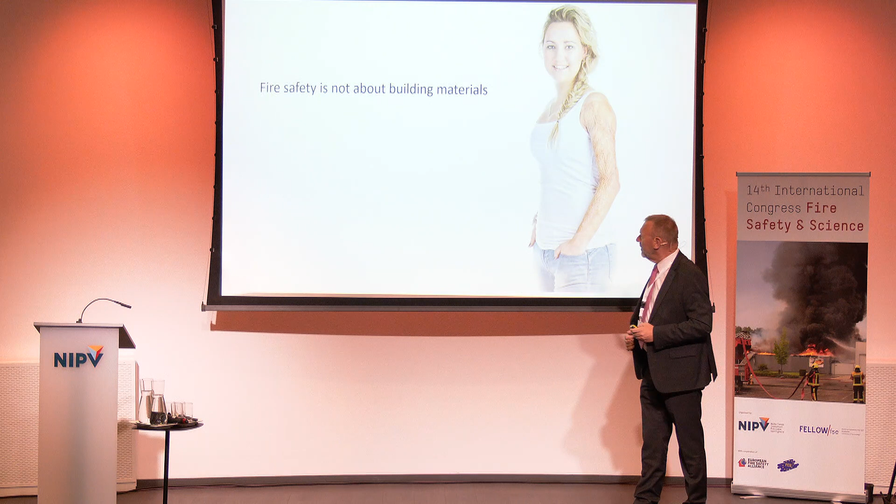It's not about figures and data. Those are numbers. Fire safety is not about numbers. It's not about engineering. And I know what I'm saying now at a Fire Safety Science Conference with all those fire safety engineers, but it's not only about engineering. It's more than that. It's not about codes. It's not about building materials. It's not about modeling.

Not about installations. Not about testing. Not about a lot of things. But what is it about? That's what I was thinking when I was invited to be here now on the stage. Fire safety is about people with names. Sanne, this is Sanne. And what we are doing, this is Sharon. Sanne is the next one. Okay. Yeah, I had to start all over again.

It's about people. What we are doing, we all, is prevent people from those burns. That is why we are working on testing, on codes, on building materials, on fire safety engineering, at the end on firefighting, and after that, about the burn scars. We all are working to avoid this. It's about people.

And I care about people, and I think we all care about people, and that's the essence of the work we are doing. Of course, we like calculations, mathematics, and whatever it is, the fire dynamics and whatever, but it's about people. And we can't do this work without caring about people.

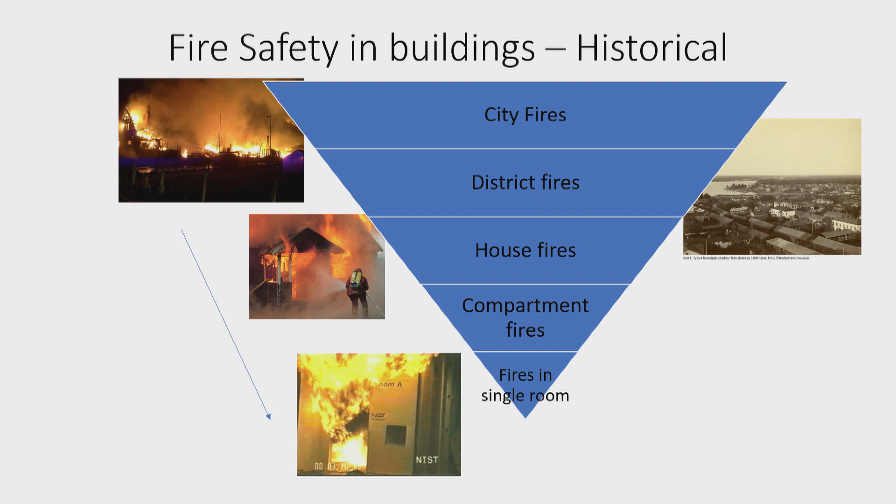So we said, okay, we still have house fires. We don't want to have house fires, so we make regulations. I'm not going to go into every step of how we reduced it. And then we said the houses aren't enough, we need to have compartment fires, and we keep them inside a so-called fire compartment.

But we see that maybe that's in order to reduce both fatalities, but also, as René showed very well, those people who are injured and having to suffer with that all their life. We are coming into fires in a single room and try to limit that and solve that. And that's a big challenge. So we have, for us, we come into personal integrity items and so on. It's a long list, and I'm not going to talk too much to take time from the other speakers.

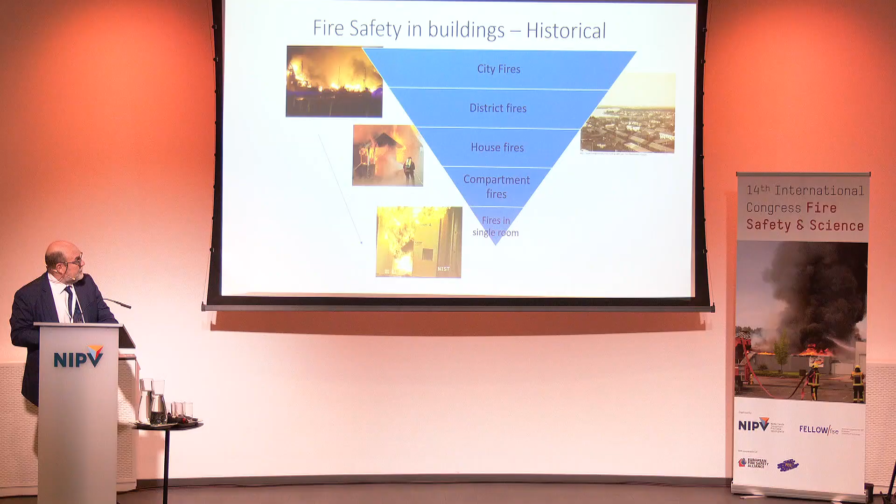But that's where we are if we look at it from the history. And we have at the other time, today and maybe the future. We have very innovative buildings, high-rise buildings, multifunctional. There's hardly an airport where there's a train station, a hotel, a conference center, and all these things. They are very complicated, and we have to solve that.

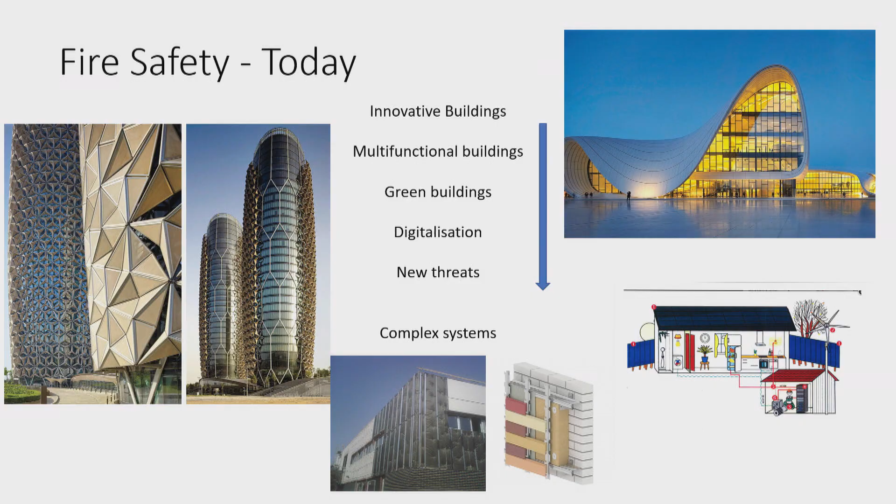We have green buildings, and I made this picture here to the right where you have a greenhouse - a house with green building technology, not a greenhouse, that's something else - where you have solar panels, you have batteries in it, and everything around that. And so we have suddenly a different situation.

And think about this again, this idea of trying to keep it inside maybe a room or a fire compartment. We have digitalization, which gets more and more present. It is kindly an aid to us, but it's also maybe a threat for us if these things are not working. And we have new threats.

When I made this presentation a year or two ago at the conference, we talked a lot about these so-called antagonistic attacks. Now we all know that after COVID we came into another safety position where we don't know what's really happening sometimes. We get very bad feelings if you see the safety and security on a military front, and we need to cover that because fire safety needs to tackle that also. And everything becomes more and more complex.

And I will talk about that. This is a little bit an introduction to tomorrow, so I have extra 5 minutes tomorrow. So that's the trick, that's a little bit the introduction.

So think a little bit about the history, how we go towards protecting, let's say, the single room, and thinking about some of these. This is not a full list, just some ideas of what we have and what pops up today, and how people have to solve this, and also how the fire rescue service has to deal with these things, which are always changing. I'm very honest, I think we are sometimes always one step behind with all the innovations and the technology. The fire safety - okay, well, by the way, there's maybe a problem with the batteries in the cars and so on, but there are already thousands of them. But I don't want to just point that out. There's a lot of things.

Okay, I prepared some water just in case. Okay.

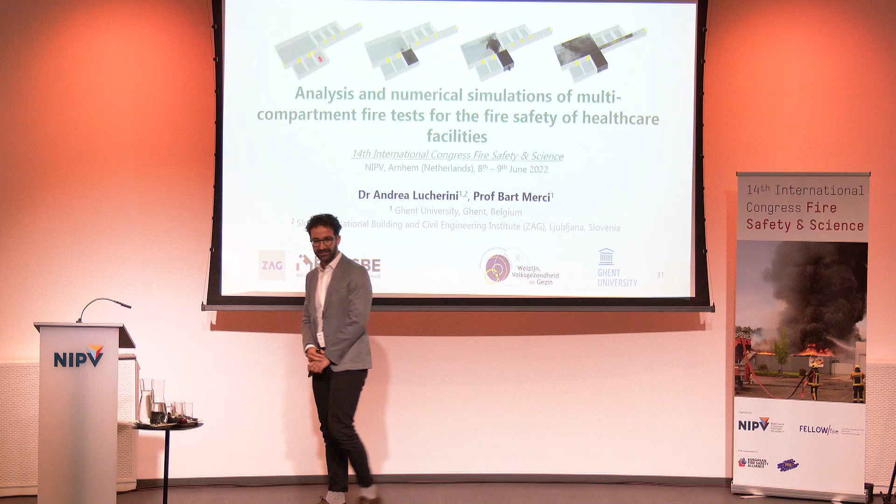Good morning, everybody, and thank you very much, Patrick, for the introduction. As Patrick just introduced, I'm Andrea Lucherini. Maybe as you can guess from my name, you'd expect a female, but I'm Italian, and in Italy this name is very commonly used for a male person. I'm here to discuss the analysis and numerical simulation of multi-compartment fire tests for fire safety of healthcare facilities.

The presentation is something I did during my postdoc at Ghent University, not too far from here, where I carried out different simulations and analyses on different compartments. First of all, it's a pleasure for me to be here today because, after 2 years of no conferences, it's great to discuss this research, because it was mainly carried out during lockdown, the COVID years. So it's very good today to sit down here and get feedback. If you have any questions about any aspect, please feel free to reach me at the end of the presentation - hopefully there'll be enough time - but also during the conference these days I'll be around, so I'll be happy to discuss that.

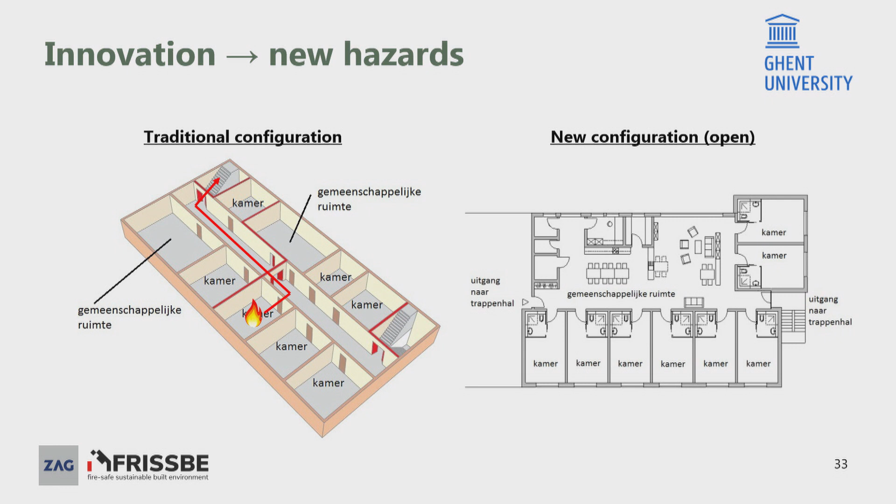This is the traditional configuration: you have compartments, rooms, a common area, and stairs for evacuation. If you have a fire in a room, people will try to escape into the corridor. The corridor usually has a low fuel load, so people can evacuate, and the fire, according to compartmentation, should be contained within the compartment of fire origin.

In the case of a fire in a common area, the person in the rooms can still go into the corridor and escape, and the fire again is meant to be contained within the compartment of fire origin.

In the new case of an open area, you have different rooms but also a big common area within or along the evacuation routes. If you have a room with a fire, people can escape and reach the stairs to a safe place. But what happens if people have to evacuate and the fire is along the evacuation route?

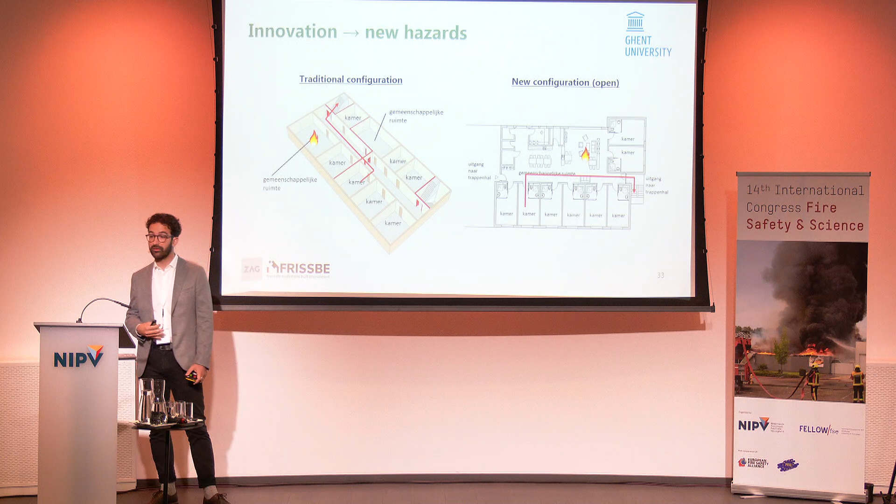This completely changes the fire safety strategy, and we might have a problem because people could be exposed to critical conditions along the evacuation routes, which we usually design and think of as safe.

So with different partners at the university and also at the institute, we started looking into fire safety in healthcare facilities, particularly how different active fire protection systems—detection, smoke extraction, extinction, different kinds of doors—can influence evacuation routes and different strategies.

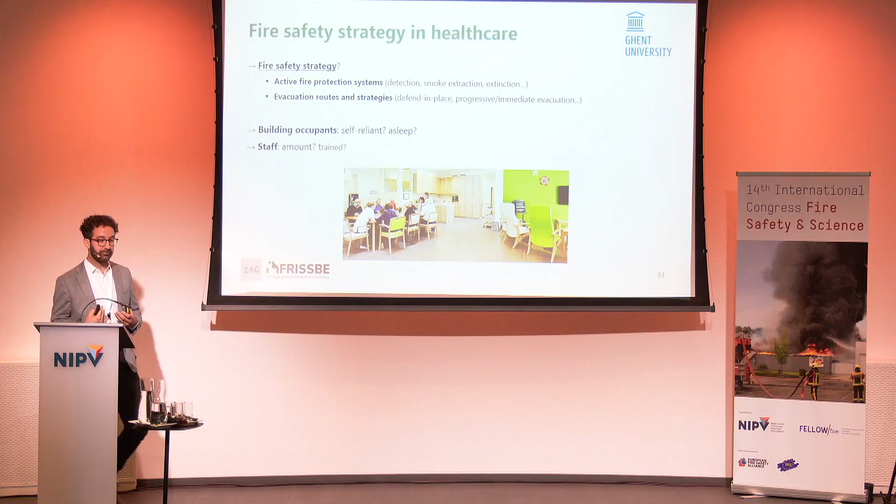Related to evacuation strategies, you can have stay-put, or horizontal and vertical evacuation within different floors. What's important within the building and healthcare facility is to understand what kind of occupants we have, because the fire safety strategy has to represent and be in line with the people within the building.

For example, in terms of occupants, are they self-reliant? Are they sleeping? And in terms of staff, is the staff trained? During night or day, what amount of staff is available within the building that can help with the evacuation strategy?

So what we did—maybe in the past you've heard about the VIPA 1 study carried out years ago—this is a continuation, with VIPA 2 and VIPA 3, of this big project that focuses on the new problem of open configurations representing a potential fire hazard along evacuation routes.

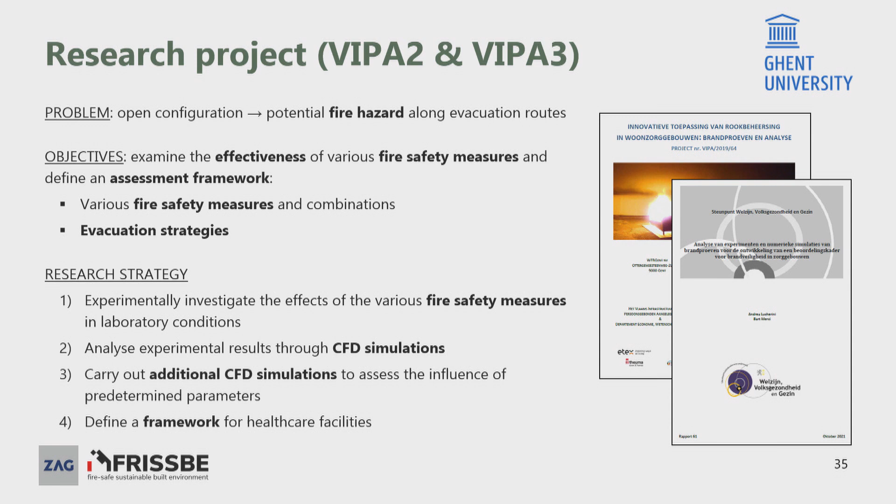The project focuses on examining the effectiveness of various fire safety measures, defining an assessment and evacuation framework to understand how different fire safety measures and combinations can be combined with different evacuation strategies.

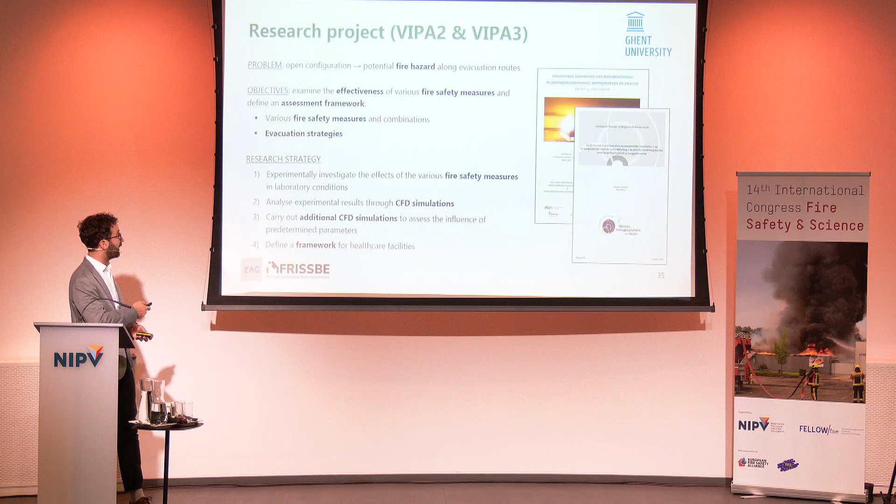In terms of research strategy, first we did some experiments to investigate the effects of fire safety measures in laboratory conditions, analyzed this information using CFD simulations, carried out additional fire safety CFD simulations to understand how different scenarios can change the variables of the study, and finally defined a framework for healthcare facilities.

To give some context, study number 1 was carried out in 2015. At the beginning, there were some large-scale tests carried out at Ghent and Warrington Fire in Ghent. This is the first case.

This is a multi-compartment facility with a big common area of about 130 square meters, two evacuation corridors with a single door or double door, and rooms connected to the evacuation corridors. The fire scenario studied here was a fire hazard from a two-seat couch.

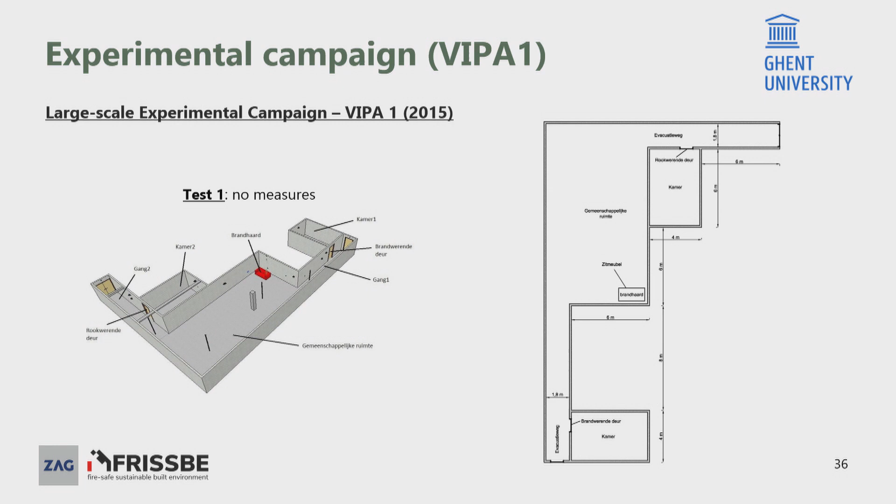They conducted 5 different tests. The first test had no fire safety measure. Then they looked into the other 4 tests, examining different combinations and how the smoke spread and fire dynamics would change with different fire safety measures.

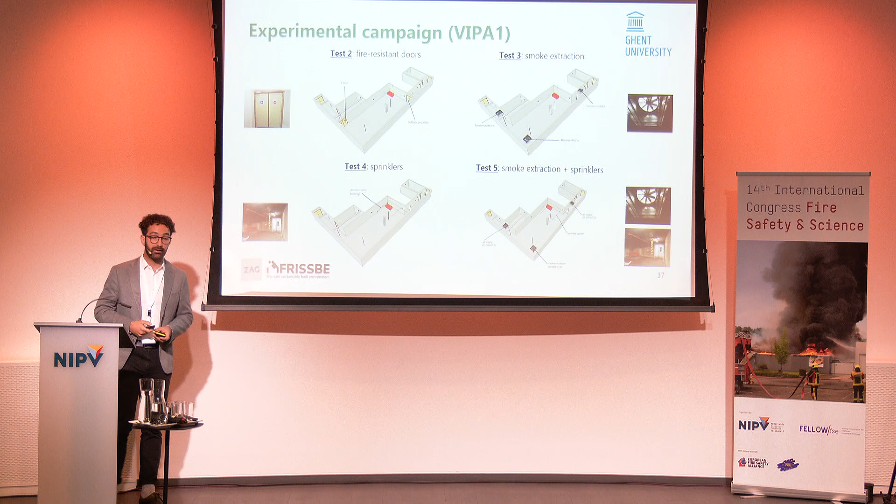The first one would be using fire-resistant doors at the beginning of the corridors. The second one is to use a smoke extraction with both supply and extraction mechanical. The third one was to use a sprinkler within the room, the common area. And the fifth one was to use the combination between sprinklers and more smoke extraction.

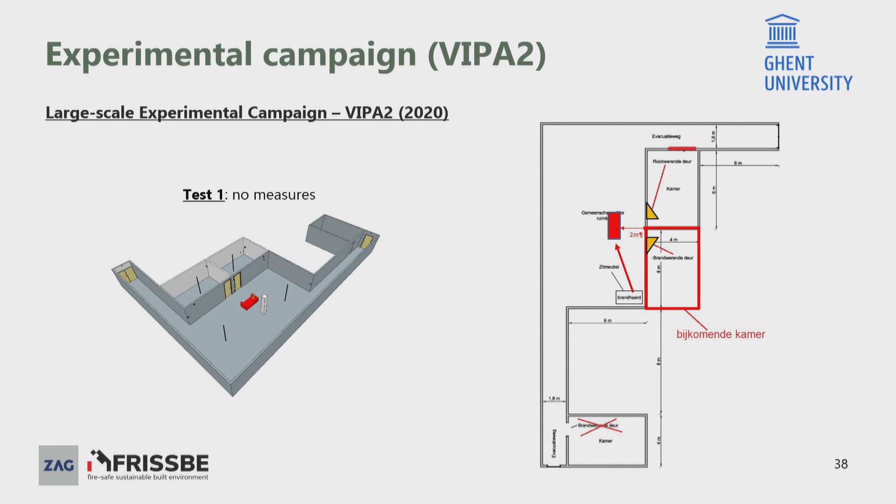And then you have the same corridors, but in this case, we look at how having 2 rooms adjacent to the common area would be affected by the fire dynamics in the common area. So you have test number 1, again, not having any measure. The 2-seat couch is on fire, and then you see the fire dynamics within the compartment.

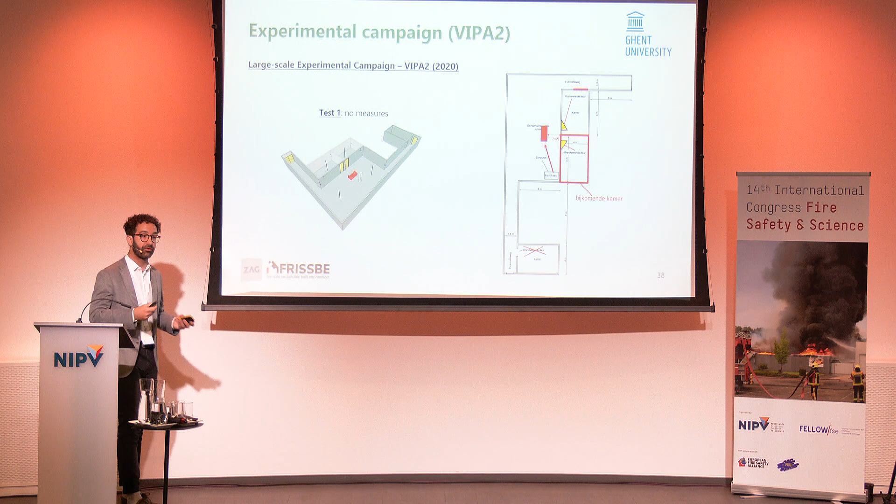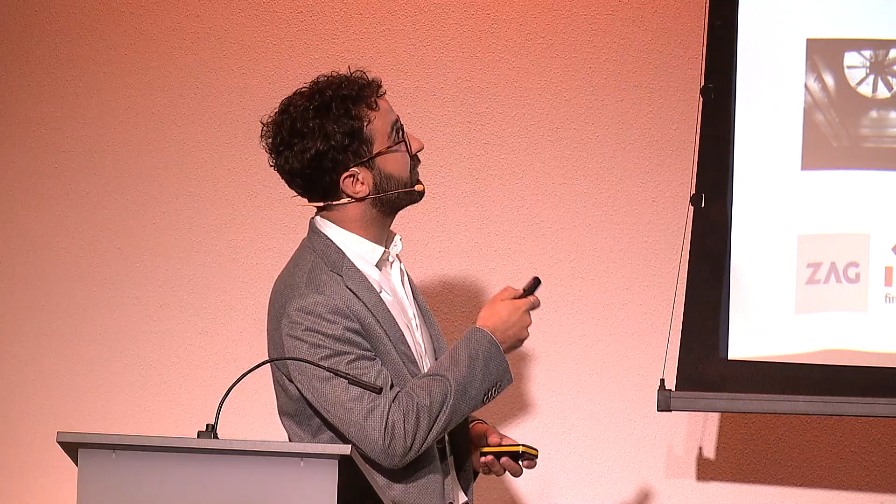Looking into, for example, what is the difference between these 2 rooms? Here we have a smoke-rated door, and here you have a fire-rated door, to see what the outcomes are and how the fire dynamics would change within the compartment. Then again, a series of tests. Then they start looking into test number 2. They use a combination of a fire curtain that would go down to 0.9 meters and a mechanical smoke extraction with openings that would provide natural ventilation supply.

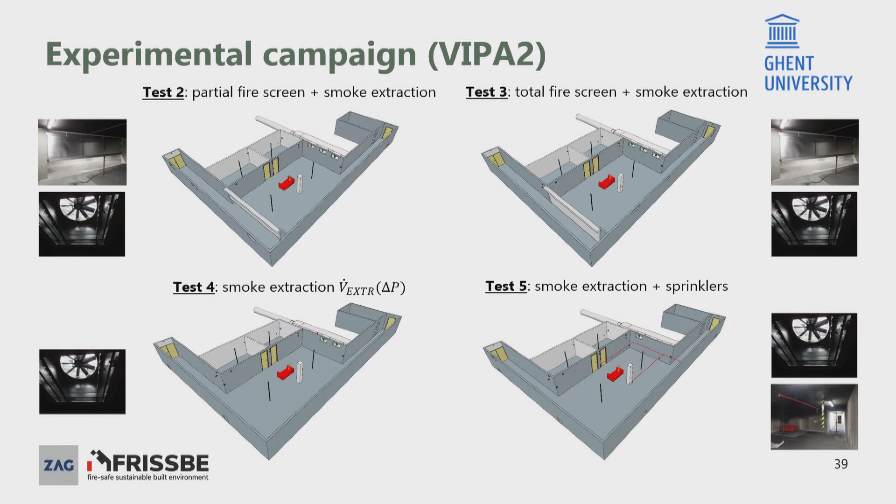Then you have test number 3, which is the same screen, but instead of leaving more or less 1 meter above the ground, it was taken all the way down as soon as the fire alarm was triggered, and then with, again, extraction. Then they also use the same configuration, but in this case they have a smoke extraction where the flow rate would change based on the pressure difference within the compartment. And the last one would be a smoke extraction in combination with the sprinkler systems.

So what is key here is which sort of fire scenario we've been considering. The fire scenario that was representative of this study was a 2-seat couch of these dimensions, with ignition on the corner using heptane-soaked low-density fiberboards. And what you can see here is that the couch was first, before the experiments, burned in a laboratory in a calorimetry hood, so you can see how the fire would spread within the couch and the evolution in time of the heat release rate of the couch in these specific conditions.

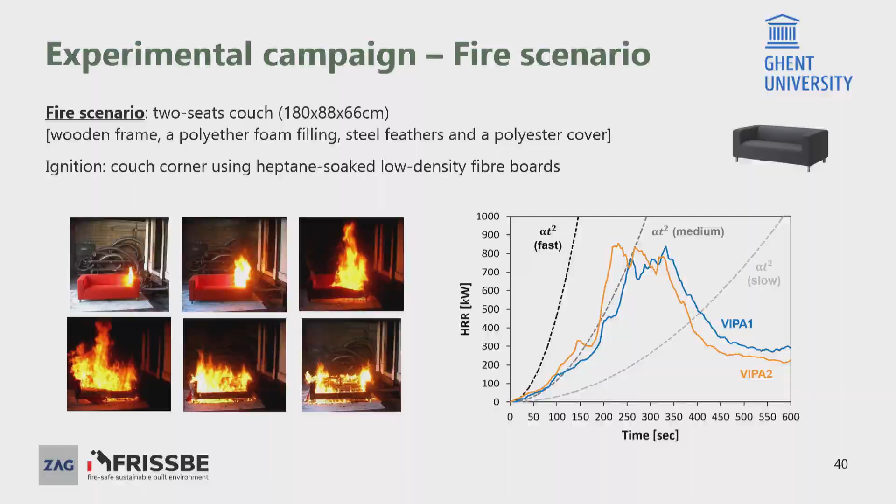In particular, what I just wanted to highlight is that if you compare to the typical alpha T-square fires that we use for design purposes, you can see that the couch would grow very similarly to an alpha T-square medium fire, with a peak heat release rate of about 800 kilowatts.

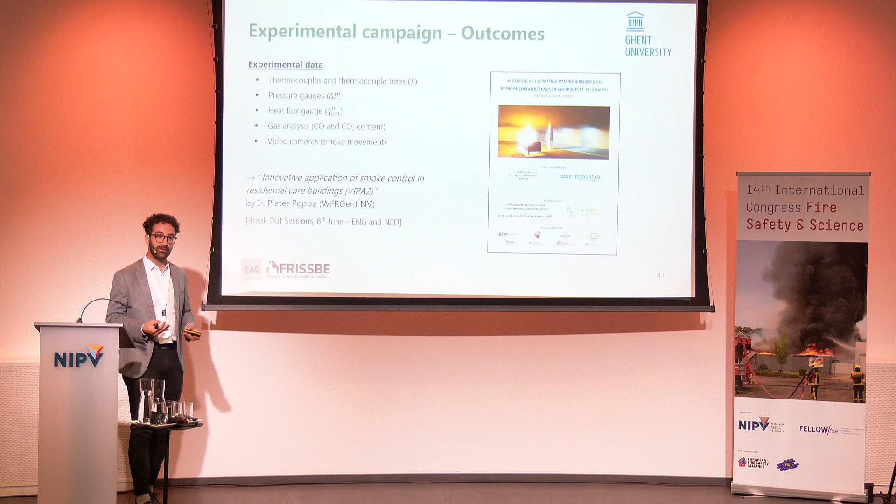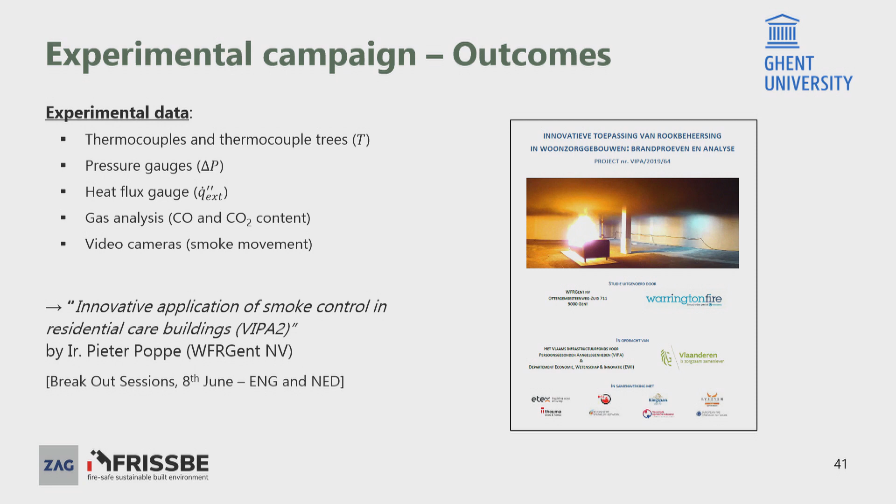Today, I'm not going to go too much into detail about the experimental results because engineer Poppe is here and is going to be part of one of the workshops later. But in general, they got a lot of experimental data in terms of thermocouples and thermocouple trees, pressure gauges within the compartment, heat flux gauges, gas analysis, and also video cameras to look at the smoke movement. If you want more information, I would advise you to attend Innovative Application of Smoke Control in Residential Care Buildings, part of the breakout sessions this afternoon, I believe.

So what I'm going to discuss this morning is instead the CFD simulations, because large-scale experiments are always time-consuming and resource-consuming. So what is important is that we get a first understanding of the few scenarios that we studied, and then we go into simulations and try to understand, by changing different variables, what the new outcome would be.

In terms of the assessment parameters, we look into the smoke movement and distribution, visibility, flow fields, so the speed of gases within the compartment, temperature, and fire-induced pressure.

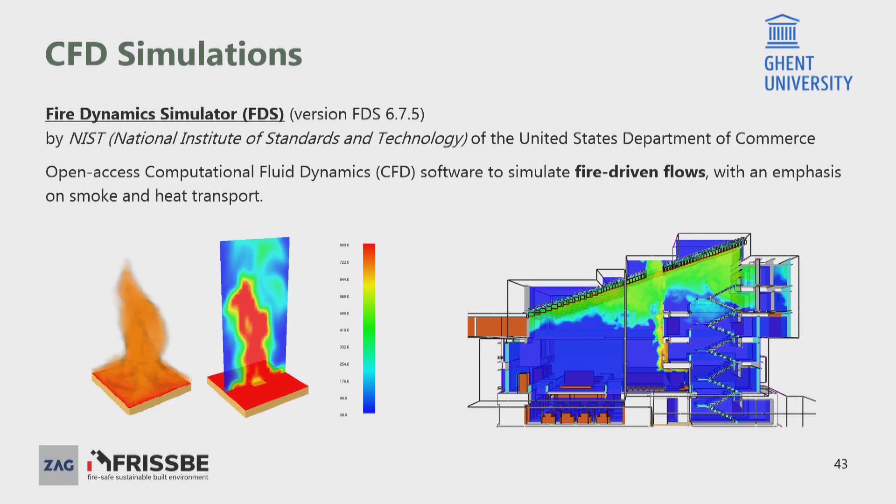And this is very well known and used within the practice to solve both fundamental and very basic problems, like here, just a surface with the fire spread and flame length, but also very complicated cases where you can see, for example, the evolution of a fire within a complex compartment.

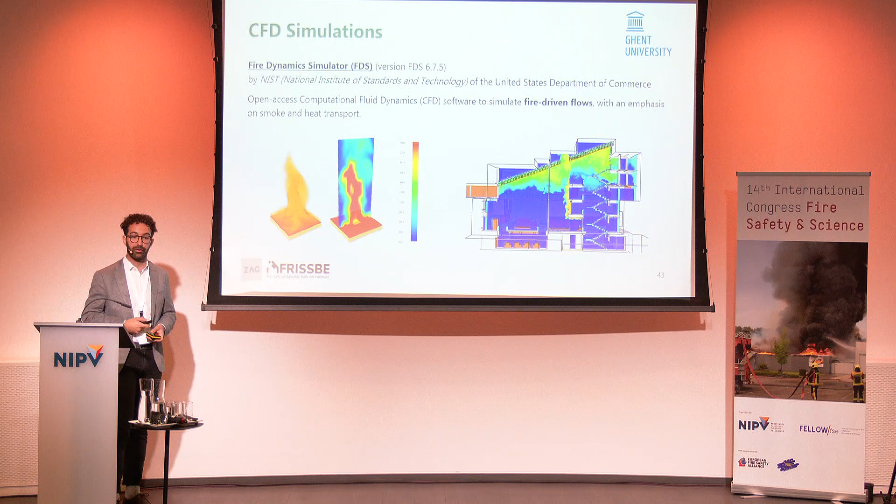So what we did, we started looking into CFD simulations. At first, what we wanted to do is to see if we could reproduce the experiment just carried out using FDS. So we defined the compartment, 10 by 10. We used a mesh which was 10 by 10 by 10 centimeters within the compartment. Within the smoke extraction, it was more refined, because it's very important to have enough cells within the extraction. Then geometry, leakages, openings, boundaries, and the fire are all designed according to what we see experimentally.

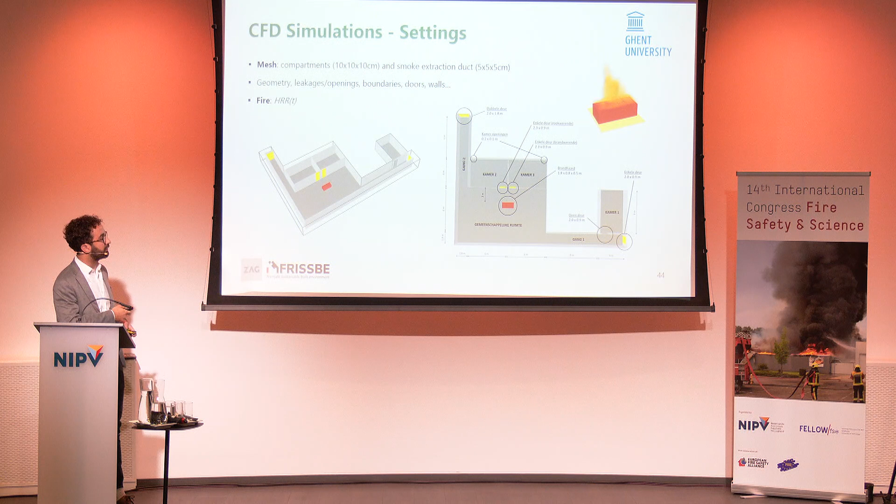So I won't go into detail on all the different settings that were set up within the compartment, how we modeled the doors, how we modeled the leakages, how we modeled the fire. But in general, in this compartment, we have the big common area, two corridors with two different doors at the end of the corridor, two rooms, one with a fire-rated door and one with a smoke-rated door, and also at the end of the corridor there is another room but without a door.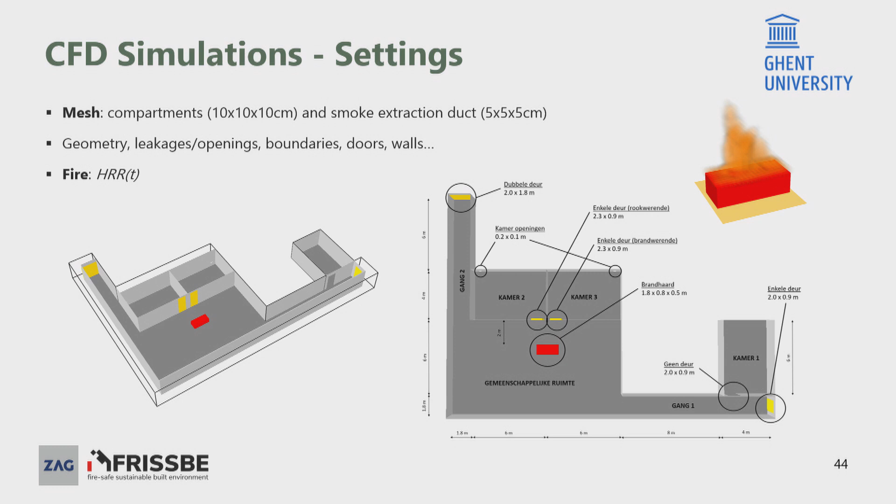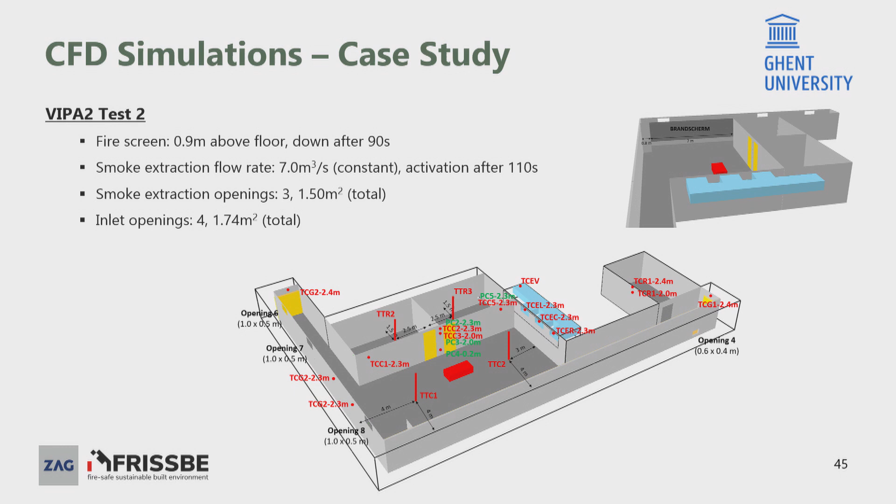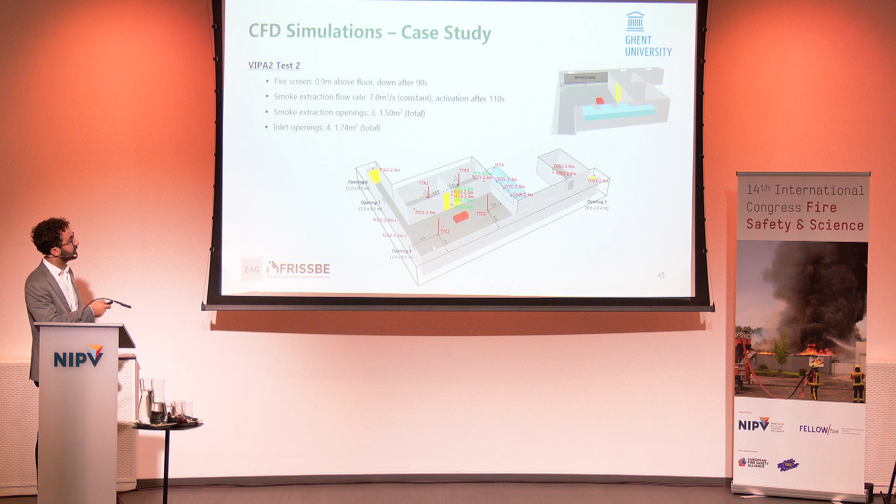At 0.9 meters above floor, we have an extraction system which is meant to be constant, 7 cubic meters per second, with 3 openings here in the common area. We have the smoke extraction opening that I just mentioned, and then we have 4 inlet openings: 1 is here, 2, 3, and also 1 here.

So what happens if we run the simulations? You can see here, this is the initial simulation, where we have the fire, here's the couch and the corridor. If I start the simulation, at the beginning we start having some smoke within the compartment. Then the smoke starts filling up the 2 corridors. Then the fire screen is activated. And when the smoke extraction is activated, you can see that this evacuation route is mainly cleared. So the extraction is enough and the fire screen is enough to keep this evacuation route clean.

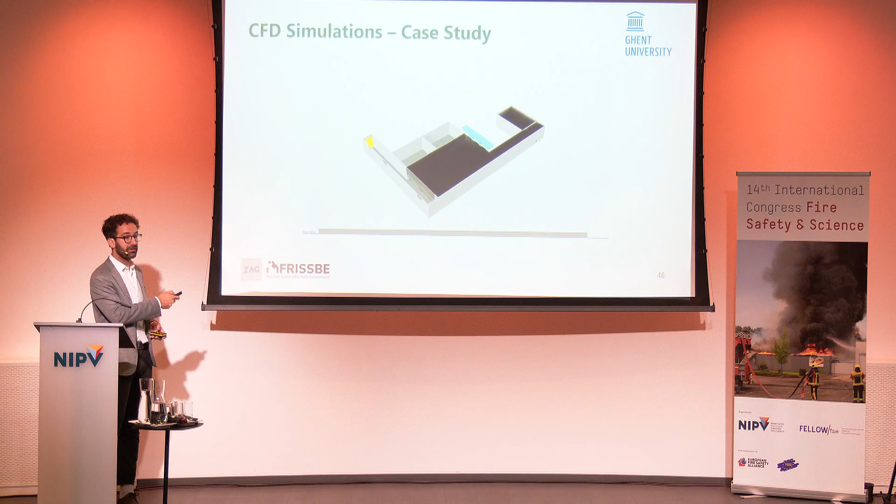And another very important thing is the heat balance within the compartment. I'm plotting the temperature measured inside the extraction duct. What is important is that by energy balance, we know we have some heat that comes from the fire, and some heat that is removed from the compartment because it goes into the hot smoke. And you can see here we have a good match in this temperature, so the heat extracted from the compartment is also well predicted.

All this information comes from, of course, not a trivial process; you have to do a lot of understanding of how to set up the simulation to get good results. Because one of the most important aspects is that there are some uncertainties in the data that you feed the model. And the main 2 for the case I showed today are the fire, so the couch, and also the extraction system.

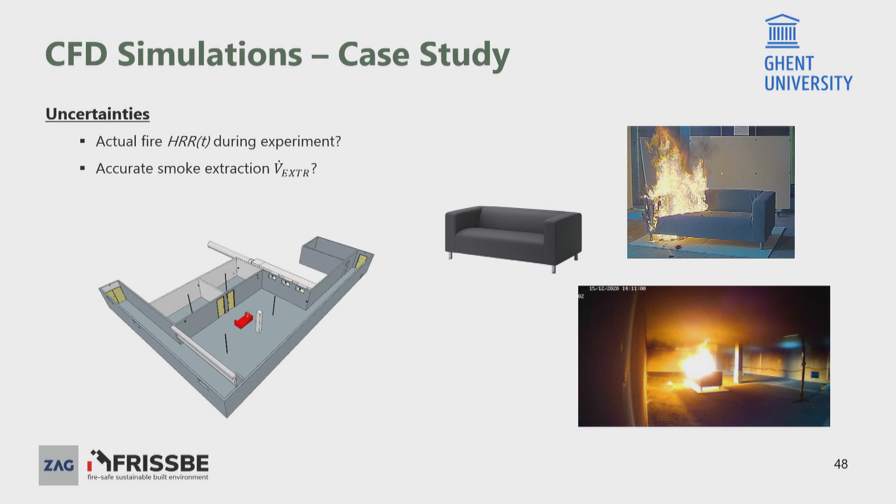The extraction system: the experimentalists told us that they set a frequency that would allow a constant flow rate within the compartment. But this is an assumption, and since the flow rate is a very big player in the problem, it's very important to have an accurate evaluation of the volume flow rate from the extraction system.

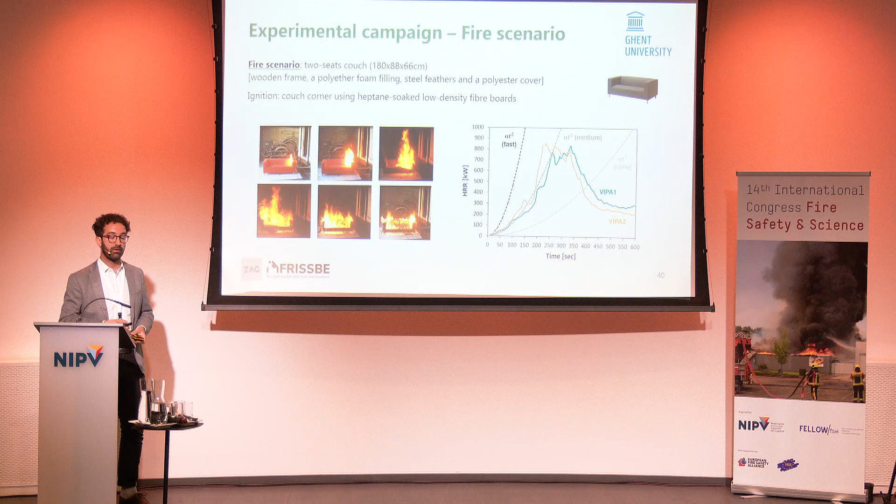But another important aspect is the fire heat release rate, because what I showed you earlier, this case is a couch that is tested in a calorimetry hood. So it's a laboratory system with a hood with an extraction rate. So you have plenty of oxygen in this case, and all the smoke is immediately extracted from the laboratory area in order to quantify the heat release rate.

But what is important, you can see here that the conditions in the laboratory and in the compartment were completely different. Here you have plenty of oxygen, all the gas flows go vertically into the hood, while here what do you have? You have the walls that heat up around the couch, a smoke layer that radiates onto the couch, different flames, so the boundary conditions around the burning couch are completely different.

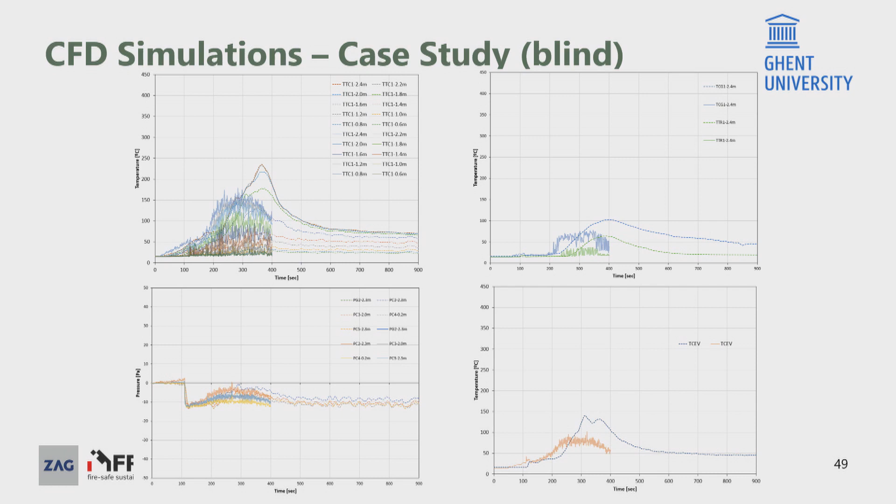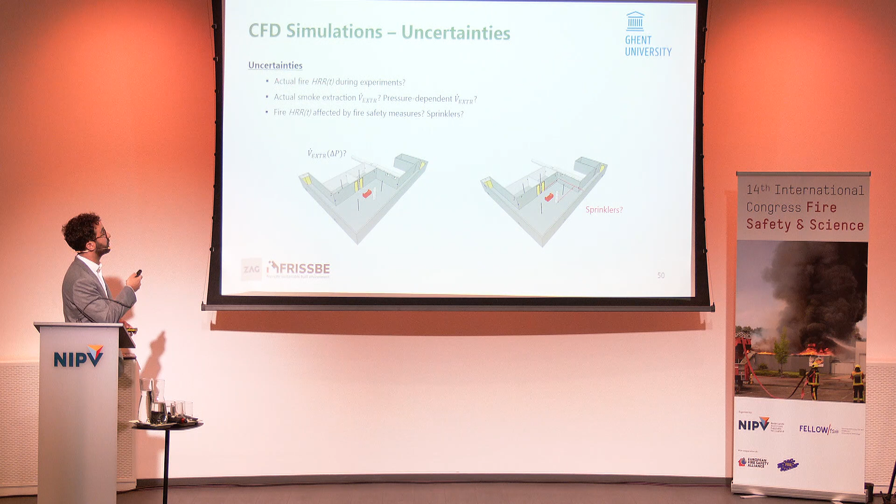So we are storing more heat inside the compartment, and this means that most likely the fire was burning in a stronger way in the case of the compartment, for the reason I also mentioned. And doing the simulation of all the cases, we got into many other uncertainties that made the simulation even harder. The first one is, as I just mentioned, the actual fire heat release rate during the experiment compared to the case in laboratory conditions.

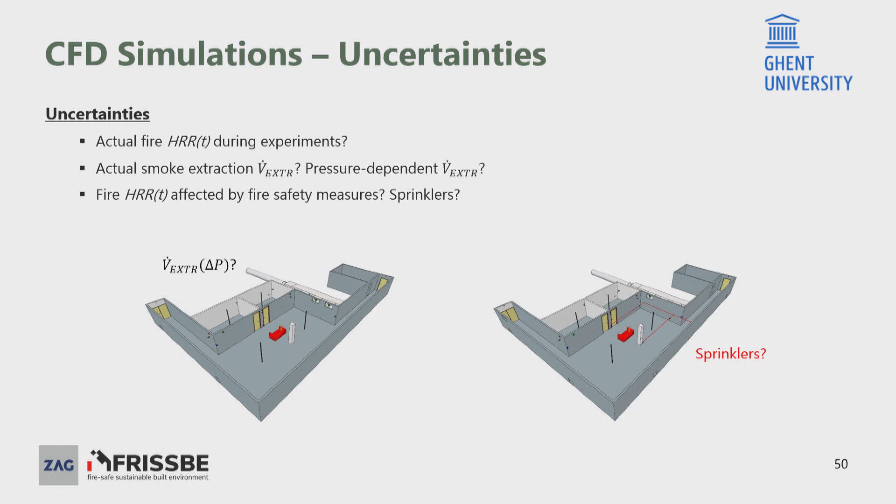Then the actual smoke extraction rate I just mentioned, and also what was the actual volume flow rate when they were actually measuring the pressure within the compartment. You have a sort of two-way system that would depend on the pressure itself. So another big uncertainty. And also, how do the sprinklers affect the heat release rate of the fire within the compartment? Because the heat release rate is a key variable within the simulation. And how does the sprinkler affect that?

And it's not a matter of how it does it. We know that it would extinguish the fire, would cool down the gases, but what are the data? What is the quantification of this value, which is very tricky and very challenging to define in a simulation, because you need to put this concept in a number.

So just to give some take-home messages: for CFD simulations, it's very important to properly design and perform experimental campaigns, in particular using various instrumentation. So it's very important to understand which type of instrumentation we need, the location, direction, and density. And also it's fundamental to properly characterize the main governing parameters, and for the case I just presented, that is mainly the fire heat release rate and extraction rate within the compartment.

So CFD simulations are a very powerful tool to study and analyze fire dynamics in multi-compartment facilities. But CFD validations and simulations could be very tricky and challenging, even for trivial cases. Then also it is fundamental to be aware of the settings and assumptions, because what I always try to communicate is that CFD is a tool that you can use to understand how different settings and different conditions would change the case, but you cannot rely on CFD simulation to understand what is going on.

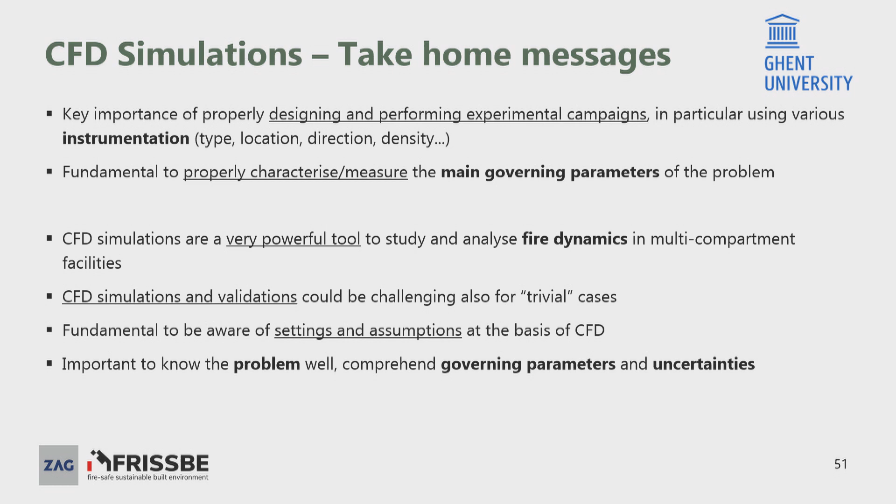As an engineer or a firefighter or a fire safety engineer, you should know already a priori what is actually the outcome that you should get. So it's important to know the problem well, comprehend the governing parameters and its uncertainties, and then understand what you can get out of the simulation. Not just do blind simulation and try to get an understanding. Because as humans, as engineers, as firefighters, we should already know what is sort of the expected outcome we could get. Of course, not an exact number, but more or less what happens.

So before moving to the other part of the presentation, where mainly we started from these conditions, we used the tested laboratory conditions and then we extrapolated to a more general setting, where you have, again, a common area, which is more or less the same size, 130 square meters. We have 3 rooms adjacent to the common area, and 3 rooms adjacent to an evacuation route with a corridor.

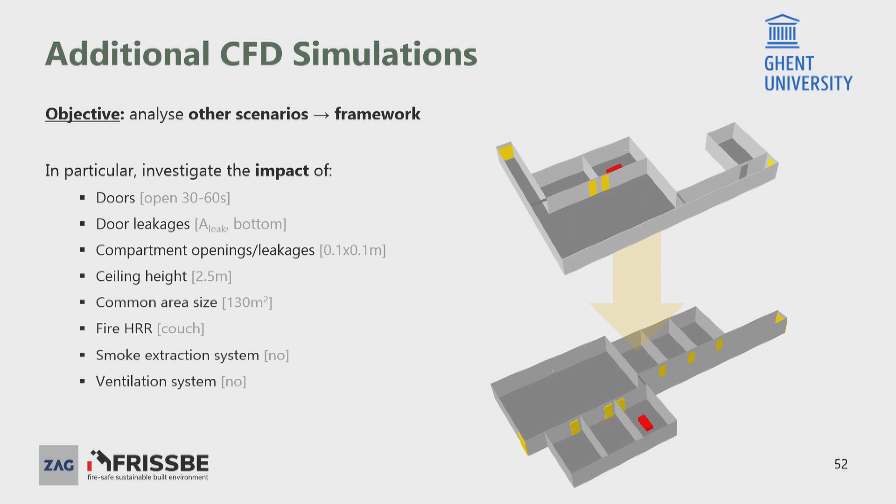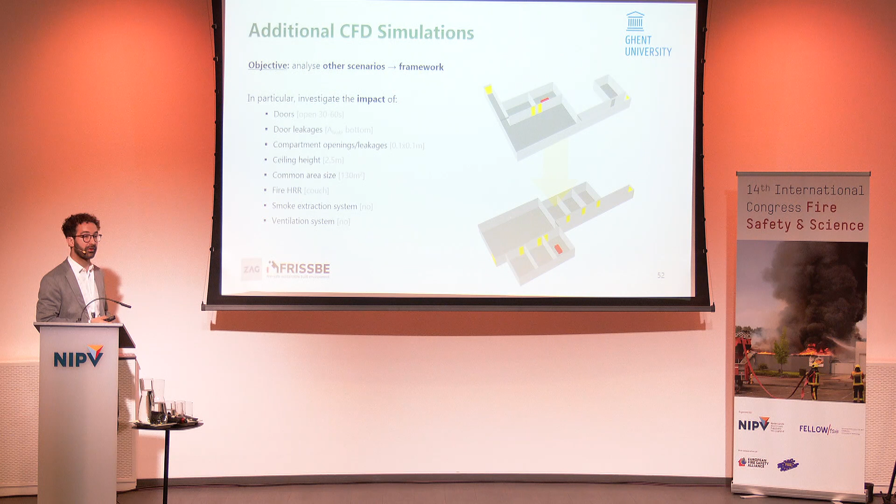And we started looking into all different scenarios, how the scenarios would affect the fire dynamics or the outcomes that I just mentioned. Particularly how the doors would affect this, if the doors are open, closed, door leakages, if you use a smoke-rated, fire-rated door, what would be the outcome of it; the compartment openings and leakages, the ceiling height, common area size, fire heat release rate, smoke extraction system, and also ventilation system. And here in gray, you can see the baseline case that we presented.

So this is the first example of how doors would affect this. In the top left, we have a closed door, open door for 30 seconds to allow evacuation, and open door during the whole fire event. What you can see between the 3 different simulations is that in the case of closed door and open door for 30 seconds, you start having collection of smoke within the fire compartment. Then the smoke starts propagating to the common area because you have a pressure build-up within the compartment, and the smoke starts spilling inside the common area.

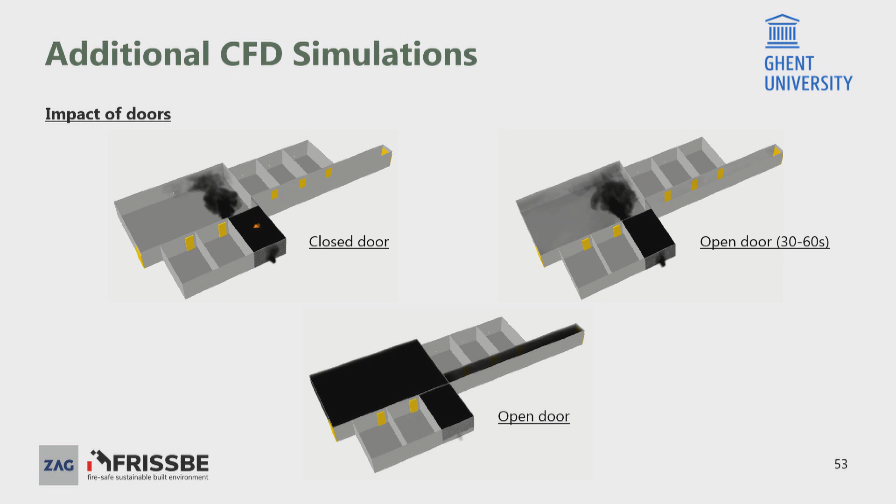But what you can see, if you have an open door, the smoke starts spreading everywhere pretty quickly. And this is related to a very important aspect, because an open door would have an effect not only on the smoke, but also on the oxygen supply that would feed the fire.

This is the dashed line. The dashed red line is the heat release rate curve that I imposed in FDS, in the simulation. You can see in the case of closed door and open door for 30 seconds, at a certain point the fire drops, because it's mainly an extinction model, so the fire doesn't have enough oxygen anymore to burn, so the heat release rate drops. While if you have an open door, you can see that the yellow simulation is following the dashed line, so there is enough oxygen for the fire to burn according to the curve that I just imposed.

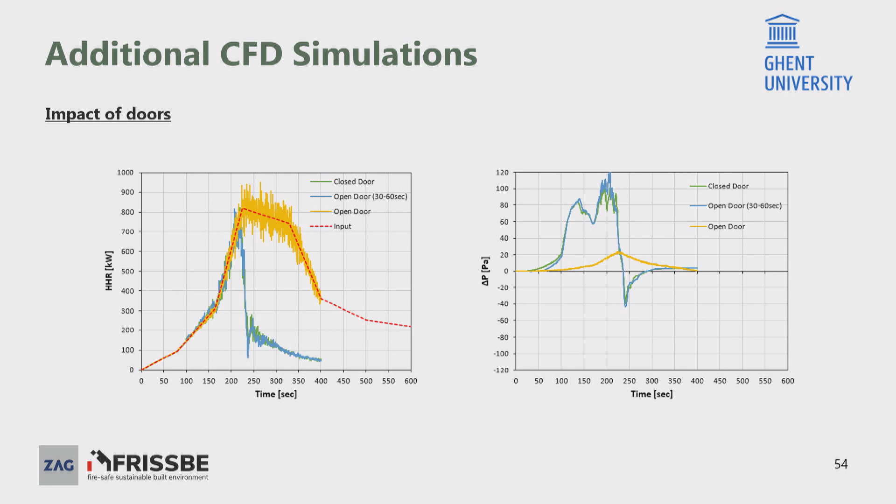If you also look into the pressure within the compartment, with a closed door you have a very big pressure peak, up to 100 Pascal within the compartment. While with an open door, you have a smaller pressure peak. This pressure peak would influence the smoke movement, but having a door open or closed would also influence the fire, giving more or less oxygen.

The other set of simulations I wanted to present is what happens if you start having different openings within the fire compartment. In this case, you might have a small hole within the compartment representing a small window, or a big window which is like 0.5 square meters.

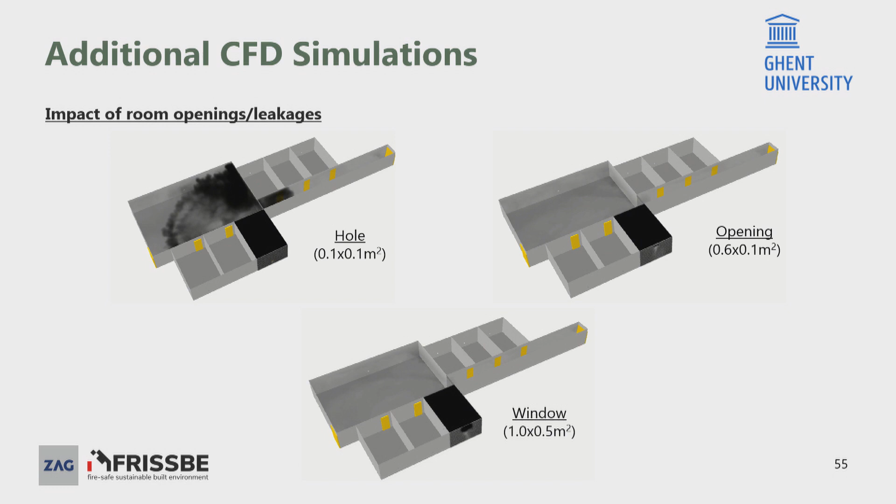What you can see is that in the case of a small hole, the door is open for 30 seconds, you have a bit of smoke that propagates inside the compartment and common area, and then with a small hole, the smoke will start spreading inside the common area because you have pressure build-up within the fire compartment. While if you have an opening, even if it's a small one, you start not having smoke spillage inside the compartment.

This is mainly related to what you can see in the pressure evolution. In the case of a small or a big opening, the pressure build-up inside the compartment is much smaller, so the smoke doesn't have enough inertia and push to get pushed inside the other compartment. In the case of having a small hole, you again get the 100 Pascal pressure peak within the compartment.

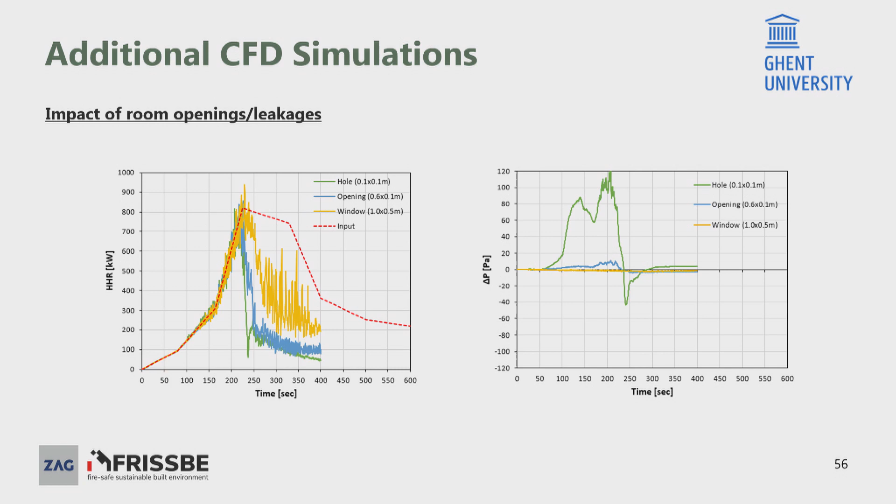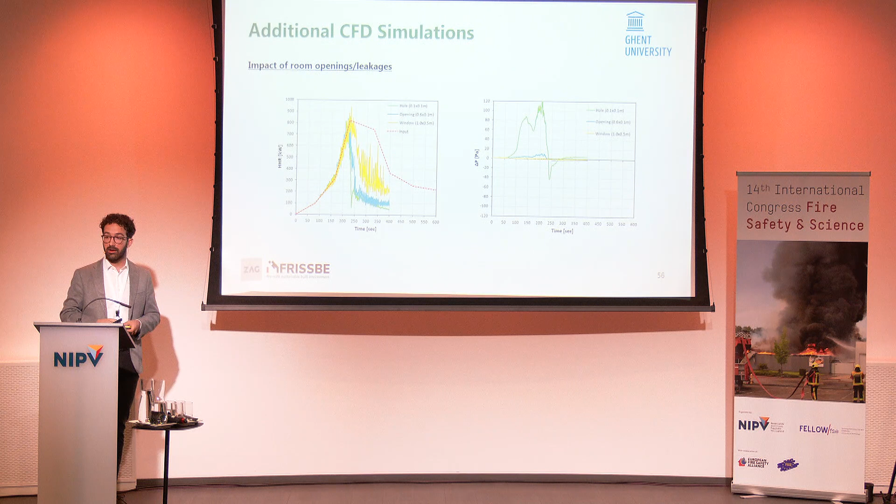What is very important is that in these simulations, we didn't consider any wind effect at the openings. This is a very important aspect, because if you have, for example, a big facade with big wind-induced pressures, this would have an influence on how the gases and flows enter or leave from the opening. So this is a big assumption, but we have to be aware that in CFD simulations, you make certain assumptions, and this may be a very important aspect.

We also looked into other different aspects: door leakages, ceiling height, common area, fire heat release rate, and moisture extraction system. Because of time, I'm not going to present these today since it takes a lot of time, but mainly you can see that varying all these variables, you can have a different evolution of the fire and the smoke within the multi-compartment facility.

The last aspect that I wanted to mention, because we focused a lot on it, is the influence of the ventilation system within a multi-compartment facility.

What is important to state here is that all this study has been done with a steering committee made of different experts in the fire safety engineering field, firefighters and architects, who would suggest common configurations that we could expect in a typical building.

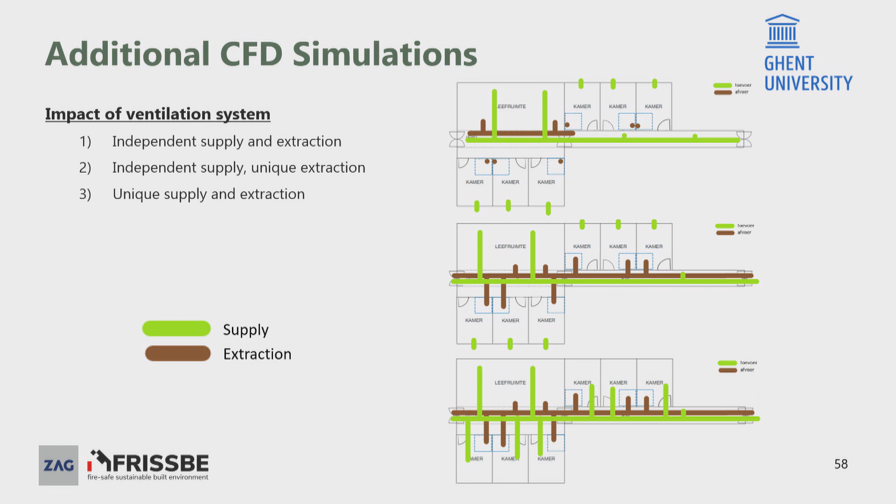These are three different configurations found in multi-compartment facilities with a ventilation system. This is the supply and this is the extraction. In the first case, we have independent supply and extraction for each room, with common supply and extraction for the corridor and common area. In the second configuration, you have common extraction for all compartments but independent supply. Finally, in the third configuration, the extraction and supply are common for all compartments.

We want to use CFD, so we start by setting up common simulations with settings suggested from common practice. We look into configuration 1, independent supply and extraction.

We have a fire in the room. The fire starts increasing, the door opens for 30 seconds, and you get a bit of smoke spillage into the common area, but the smoke mainly stays within the compartment. At a certain point, you start having smoke spillage into the common area because of overpressure within the compartment. But all the other rooms remain safe because there's no smoke spillage through the ventilation system.

Something interesting I'll discuss briefly later: in CFD simulations you can sometimes get weird results because there isn't enough oxygen within the compartment, so you start having combustion at the openings. This is a bit of a strange result, but I'll explain what it means a bit later.

Looking at the results - heat release rate follows the same curve, with pressure conditions showing a peak that is relatively small, within 20 Pascal. Looking at thermocouples within the ventilation system, both supply and extraction, you can see there is no temperature rise because there is no smoke traveling through the ventilation system.

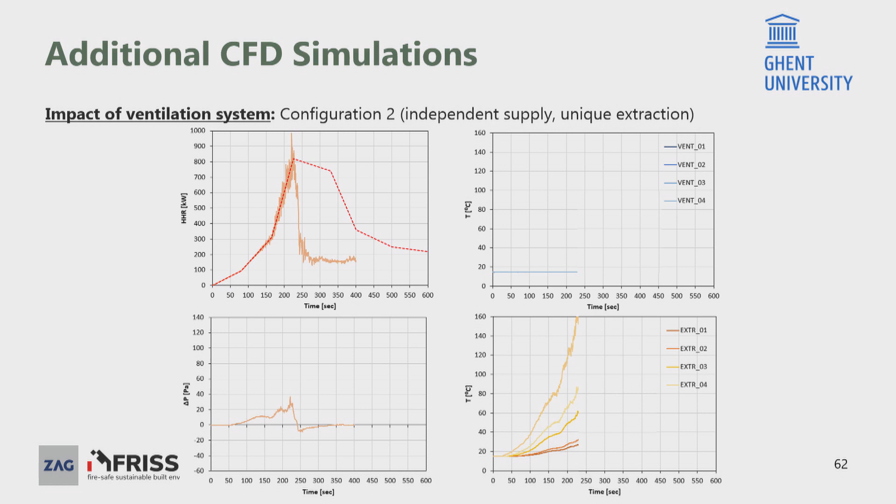Again, under ventilated conditions with a relatively small pressure peak, but in this case, looking at the thermocouples in the extraction system, you can see some smoke does enter the extraction system because the extraction system communicates with the fire compartment.

The problem comes with configuration 3, where supply and extraction connect all the different compartments. You can see fire within the room, then some smoke escaping through the open door, but then the compartments ahead on the ventilation supply start receiving smoke, because due to pressure, the smoke goes into the ventilation system and spreads into the other compartments.

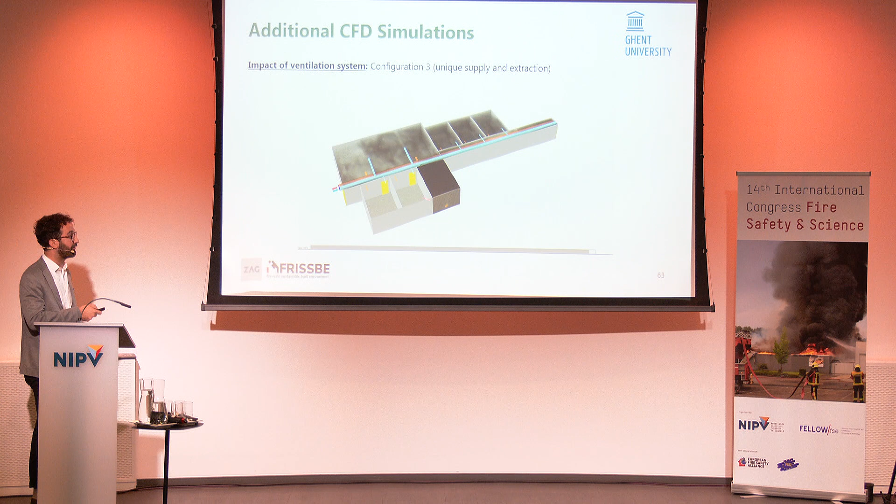This is a very dangerous situation, because if you don't turn off the supply, you start having smoke spillage not just in the fire compartment but also in the other compartments. This would be very challenging, for example if you have a stay-put strategy, because you would essentially start intoxicating people in other rooms who believe they are safe, thinking the fire is contained to one compartment when smoke has actually spread into other facilities.

In line with what I just mentioned, you can now see temperature and smoke traveling along the ventilation extraction system, but also smoke traveling along the supply that spills into other compartments.

So we start thinking about how we can solve this. Can we solve it by opening a window? With that, we have to be aware that a window would provide some oxygen to the fire, but it would also release the pressure peak within the compartment.

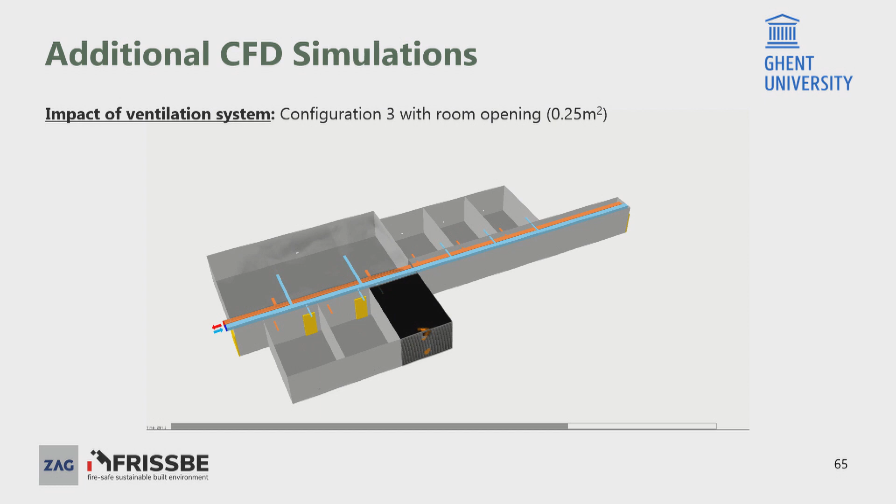So you can see here, since you reduce the pressure within the fire compartment, the smoke is not able to travel along the supply because it doesn't have enough pressure. Under ventilation, the pressure peak is smaller. You have smoke that travels along the extraction, but not smoke that travels along the ventilation supply.

The last case I wanted to present: talking to the steering committee, some of them argued that you might have fire dampers within the ventilation system that would stop the fans in case of a fire alarm. You can see here, if you have dampers that stop, and then you have our window, the smoke would travel inside the ventilation supply system, but would not be able to spread further because it doesn't have enough pressure.

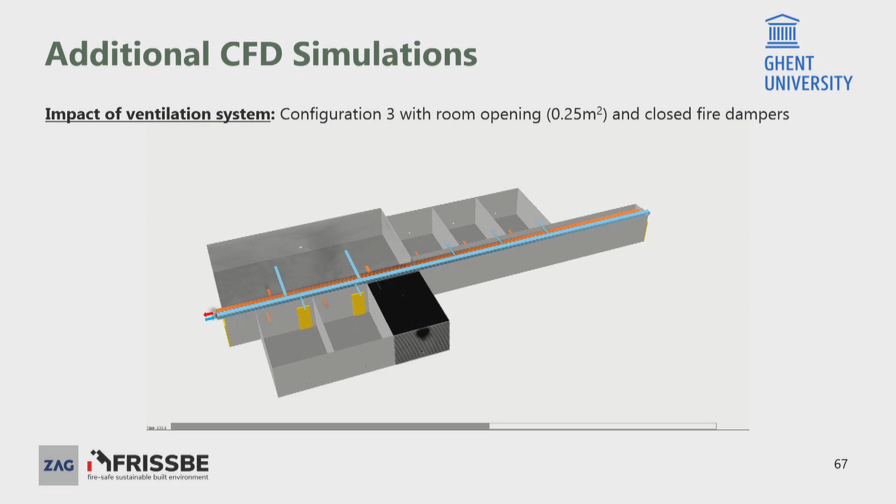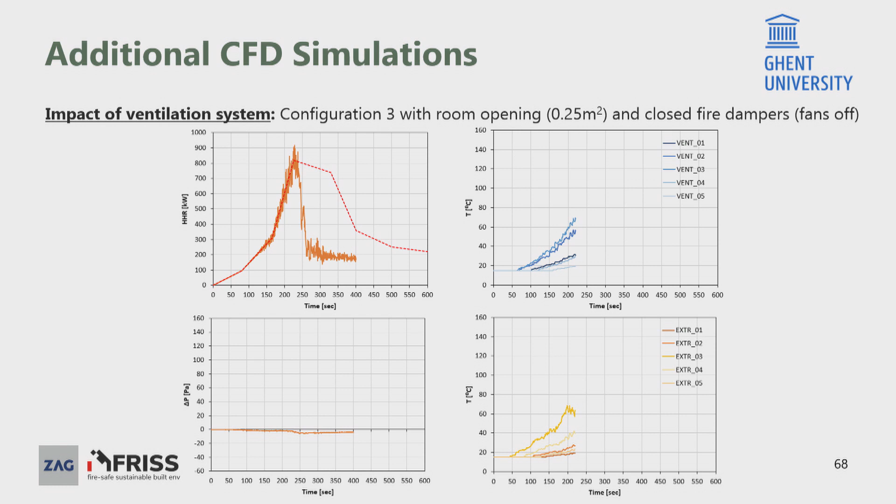You have a lot of pressure losses due to friction within the ventilation system, and it's not going to spread into the other compartments. This is clearly seen - it travels within the ventilation supply and extraction system, but the pressure peak is very small, so the smoke doesn't have enough energy to make it to the other compartments.

Just to wrap up, some messages I wanted to give from today: CFD simulations are a very powerful tool for parametric studies, but it's very difficult to rely on absolute values. What I showed today, I didn't comment on having 250 or 300 degrees, because we're always talking about qualitative data and qualitative analysis - we try to understand if you change a certain parameter, what would be the effect on the problem we are studying.

It's fundamental to be aware of the settings and assumptions at the base of CFD simulations, to know the problem, comprehend the governing parameters and uncertainties. In test number 2 that I presented today, what was fundamental was the fire within the compartment, but also the extraction, because there are two main governing parameters for this case. There are some large uncertainties in FDS in under-ventilated conditions, which I mentioned when you start having flames outside the window.

What I would like to advise is that in the afternoon, there is going to be a very interesting breakout session looking into this specific problem and smoke propagation in buildings, simulation based on experimental research by Pim and Ruth, that will discuss the under-ventilated condition in multi-compartment facilities. Different fire safety measures can be more or less effective for limiting smoke spread in multi-compartment facilities. Ventilation systems can be hazardous in multi-compartment facilities.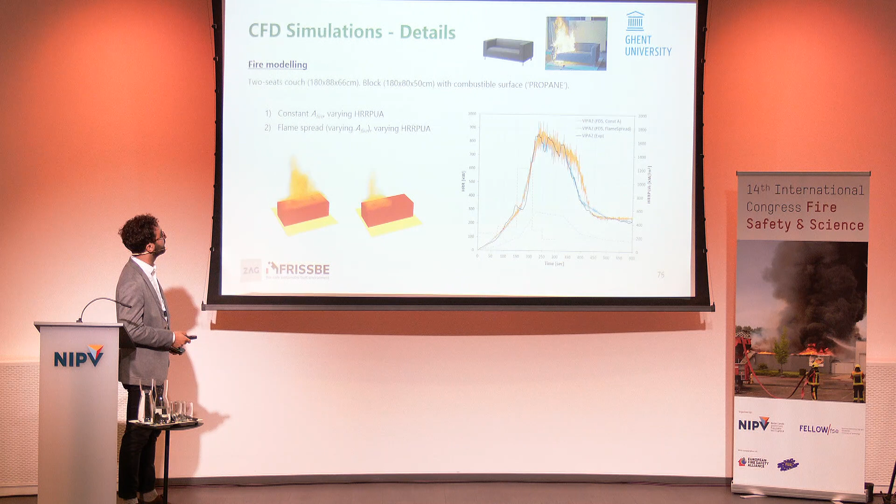So what happened, as you mentioned, is the leakages are a very important parameter when you look into smoke spillage. Before running all the experiments, it was carried out according to the standard blow door test with a 50 Pascal pressure increase within the compartment, and according to different theories, the leakages at the compartments were estimated - along the walls, at the doors, single doors, small doors. There's also a difference between a fire-rated door, 72 centimeters square, and 3 centimeters square for the smoke-rated door. This was implemented at the base. I didn't have time to go into all the details, but it was estimated according to the standard.

Thank you. You're welcome. Okay, next question. I think, yeah.

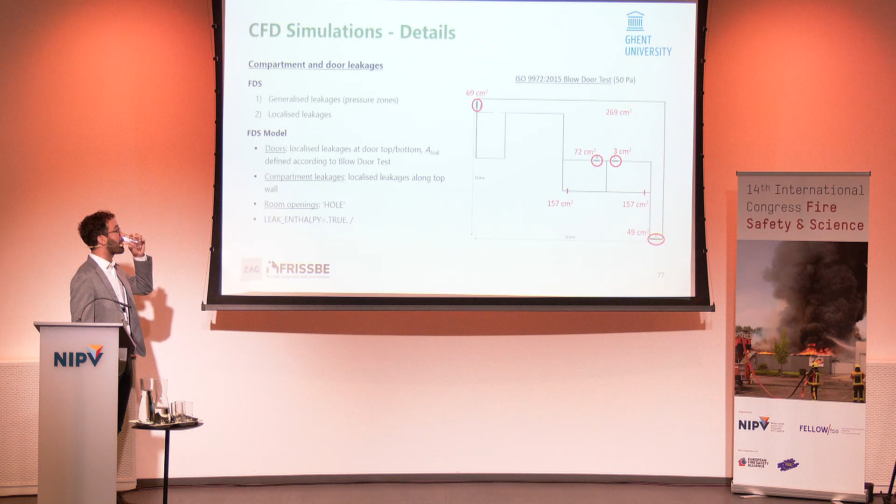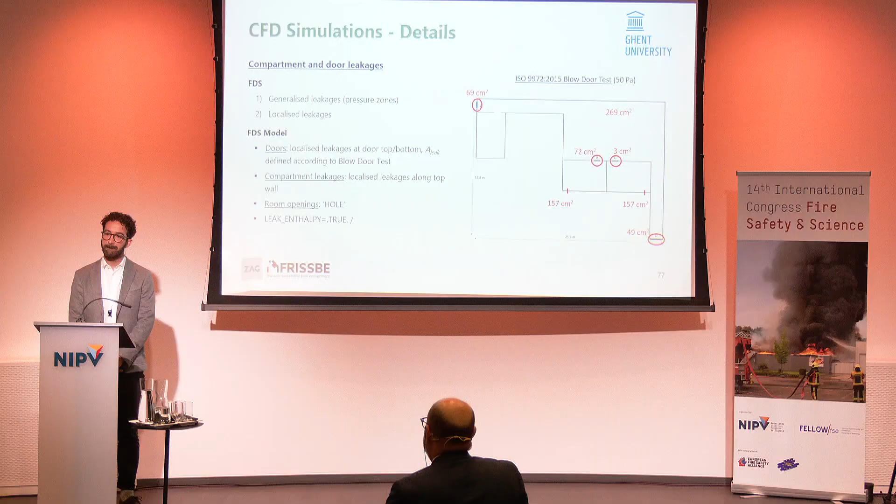Thank you, Andrea. I have a small question relating to how sprinklers would affect the pressure buildup in such a compartment. What did you see?

This is strange. Okay. Okay.

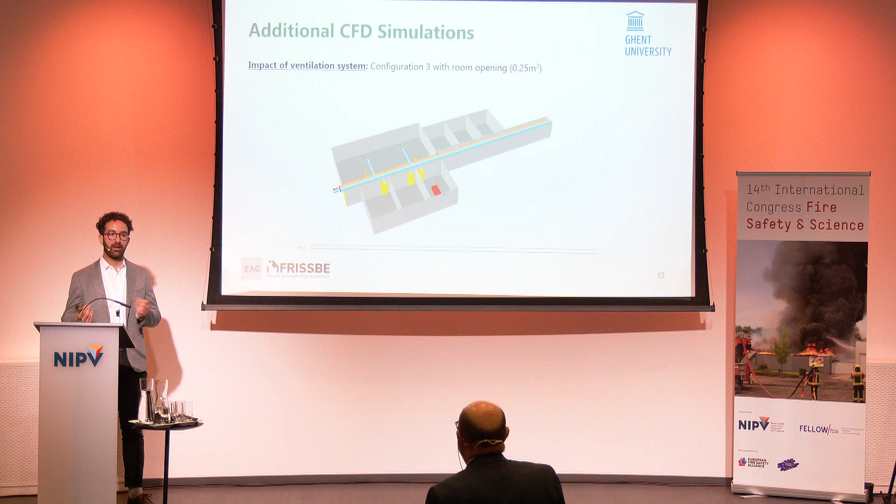What I can say is that at Ghent University there is a lot of research going on regarding the effect of any extinction system on fire dynamics. FDS and these simulations are still a bit behind, because there is still a lot of knowledge that has to be developed in understanding particle size, particle distribution, and the effects. In theory, if you have a sprinkler that would activate, it would be located above the couch. So what you can expect is that if the sprinkler activates, it would significantly reduce the heat release rate of the fire.

Therefore, you would have a much smaller pressure peak. A sprinkler would also reduce the temperature of the gases within the compartment, again tackling down the pressure peak. So it could be seen as working similar to a solution like opening a window, for example, that would reduce the pressure peak and avoid smoke spillage into adjacent compartments.

Thank you. You're welcome. Yeah, Ruud.

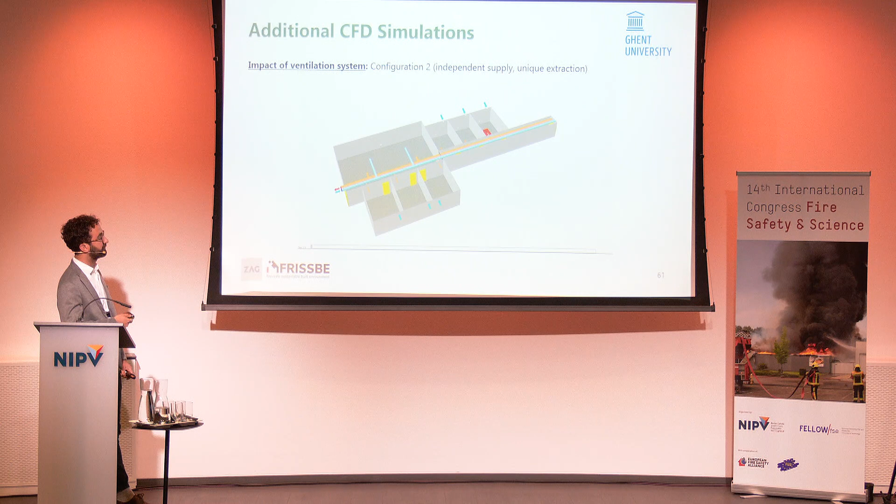Thank you, Andrea, very nice work. Ruud van Herpen, Eindhoven University. A question related to the one Mir asked: you showed us the equivalent leakage area. But the equivalent leakage area depends on the pressure difference. Is it a constant factor, a constant opening, or is it also depending on the pressure in your case?

That's a very good point, thank you for the question. Mainly, according to the standard, you impose a constant pressure increase, which is 50 Pascal, as highlighted here. But what I showed you earlier, we had pressure peaks of 10, 20, 100 Pascals within the compartments, and this would definitely change if you have a different pressure increase.

Because what you can see is that if you have a bigger pressure increase, small holes or leakages could open. So this value is assumed constant based on this pressure increase, because this is the information we had. But I would expect these leakages would increase with a higher pressure increase within the compartment. In FDS, for every simulation you usually have to give a number, and this is the information we had—I believe it's better to use something defined according to the standard rather than just throw some numbers.

Okay, yeah, so I have a question. Thank you for your presentation, very clear. I was wondering, why is it so difficult for these simulation models to impose the wind? Can't you just impose a counter pressure on the window or whatever? So why is it so difficult to take it into account?

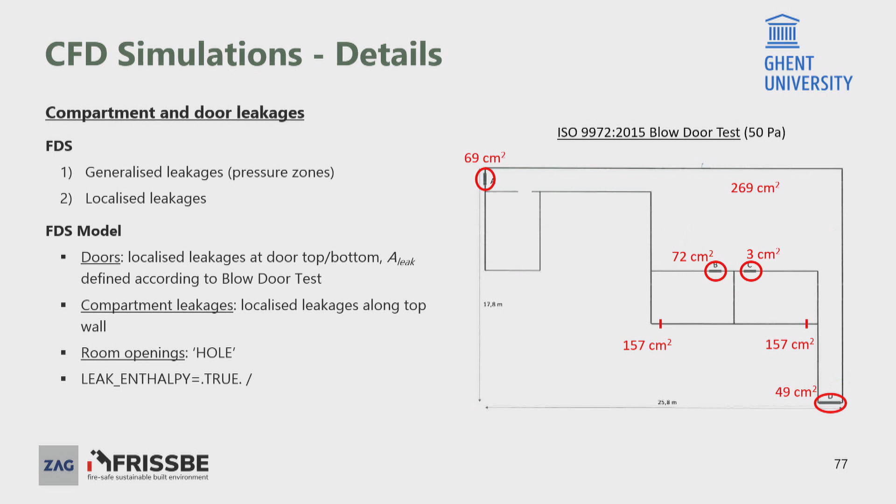Easy question, another easy question! Thank you very much for the question. In general it's not hard, and it's something I didn't present today, but we did the study where we assumed a constant flow velocity, horizontal to the floor, going into the facade and creating an overpressure. We saw there is definitely an influence, but then the question is which wind speed you would impose. It's something you can do easily, but would you use 5 meters per second, 10 meters per second? By using a certain speed on the facade, you would have a different pressure exchange at the window, and therefore a different effect on the pressure peak.

But what you can see is that if you have enough inertia or enough wind speed and momentum at the window to not let the gases leave the compartment, then you would have the same effect as having a wall. And also, you could go into the case where you start blowing oxygen inside the compartment, feeding the fire with the fresh air it loves if it wants to burn.

Okay, any further questions? Okay.

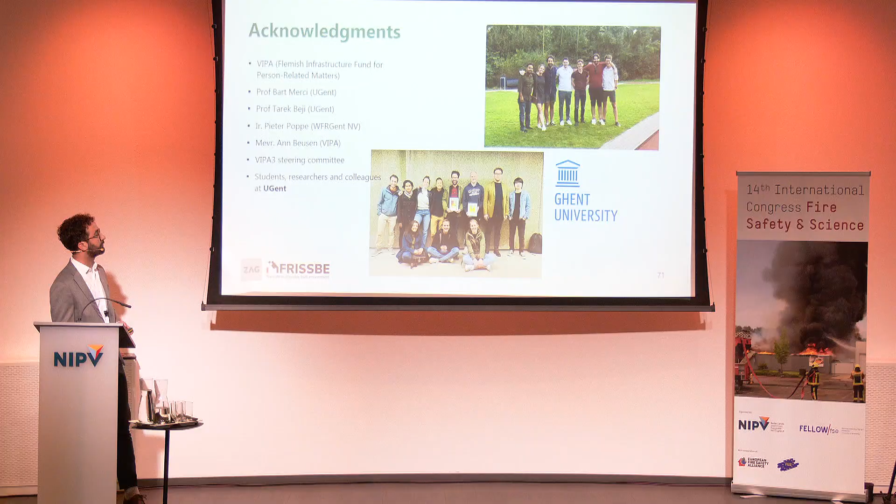So my question is, I did not see where you mentioned sensitivity analysis, because at the fire source you could also maybe use a finer mesh, and it could probably give different results. And my second question is, how did you deal with pressure buildup when you simulated the smoke extraction? Thank you.

So regarding the first question, what we did, and it was also part of the sensitivity study of the scenario study, you can see here, we looked into the fire heat release rate. So for example, we used this couch that I was testing in the laboratory, which was a medium alpha t-squared fire with about 800 kilowatts as a peak heat release rate. But we also started looking into fast fires.

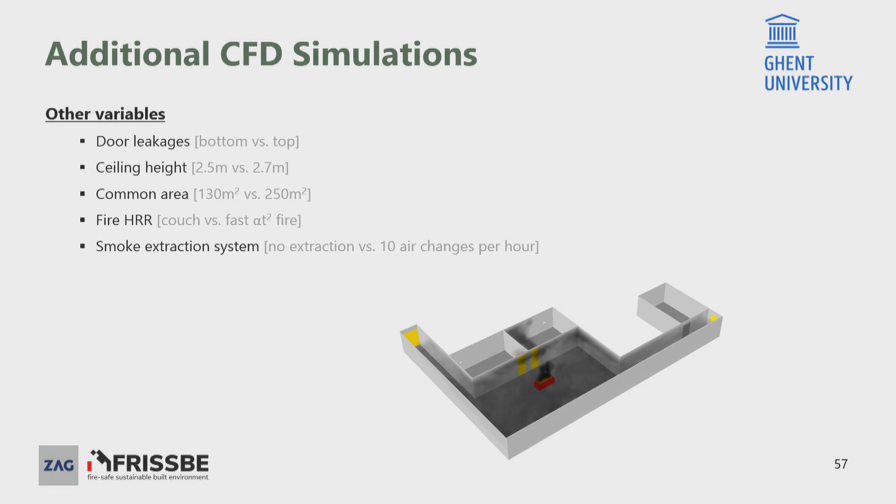And I didn't present it today, but if you have a faster fire, since you have a bigger rate of change within the compartment gases, you would end up with a bigger pressure peak. And also, since it grows faster, it would have all the same problems I presented today, earlier in time.

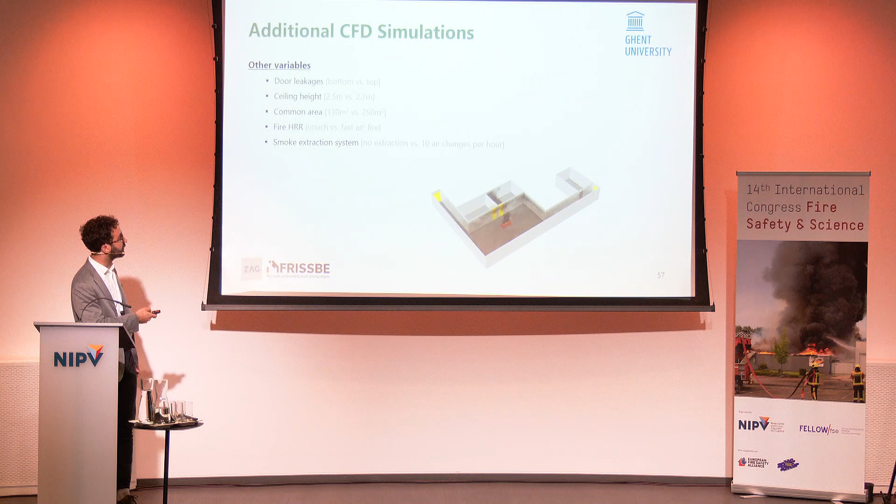And the second question was about the pressure buildup with the smoke extraction. In FDS, the pressure buildup is a key parameter within the compartment, and it's automatically calculated based on the heat release rate and extraction. What we did, we imposed an extraction rate according to a certain speed and a volume flow rate at the extraction. I don't know if I have something here.

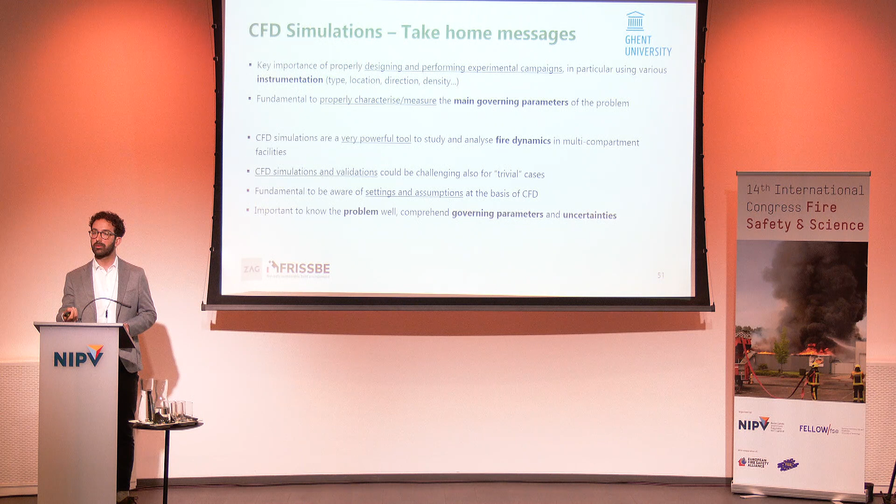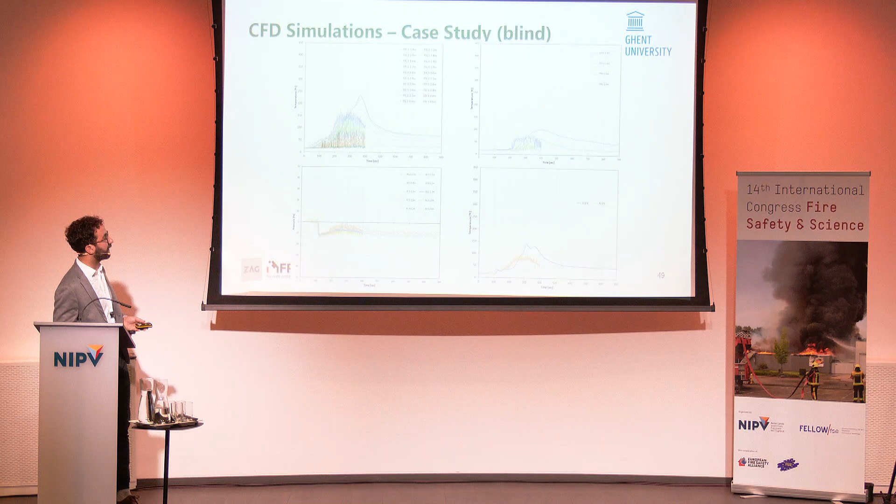It's a bit hard to go back, but mainly we imposed a flow rate, and the flow rate directly influences the pressure buildup, because you start removing air from the compartment. Therefore, you're reducing the pressure buildup, because the air that wants to expand within the compartment and creates overpressure starts being removed by the extraction system. So one of the big advantages is not just removing smoke, but also limiting the pressure buildup inside the compartment through the extraction system.

Okay, I think, yeah, I cannot refuse you. You are very kind. Peter van der Leur.

I liked your statement about the difference between parameter studies and absolute predictions. Would you go as far as to say that the predictive value of a CFD simulation is small? The predictive capability of a CFD simulation in cases where you don't have measurements to validate against.

So what I would say is that it depends if you use it for the profession or for research. Today I presented research where we have laboratory experiments, and I tried to reproduce what happened in the laboratory. What I wanted to make you understand is that you need a good understanding and quantification of the key variables, which means the volume flow rate and the actual fire within the compartment, because we quantified the fire in the laboratory, but the conditions were completely different. So most likely the heat release rate curve will be different.